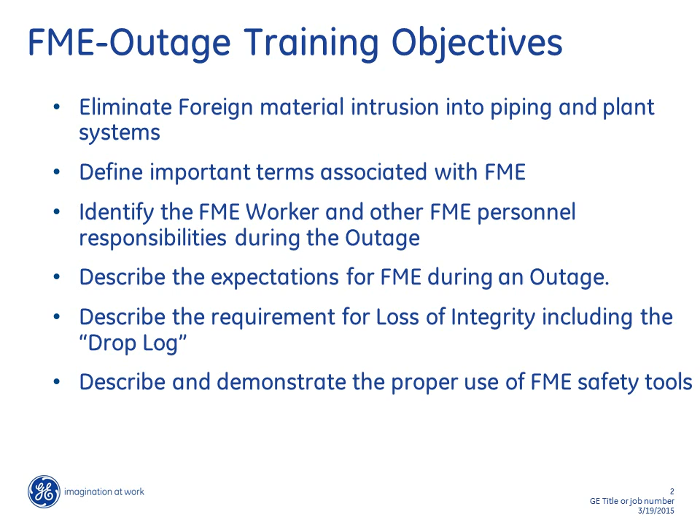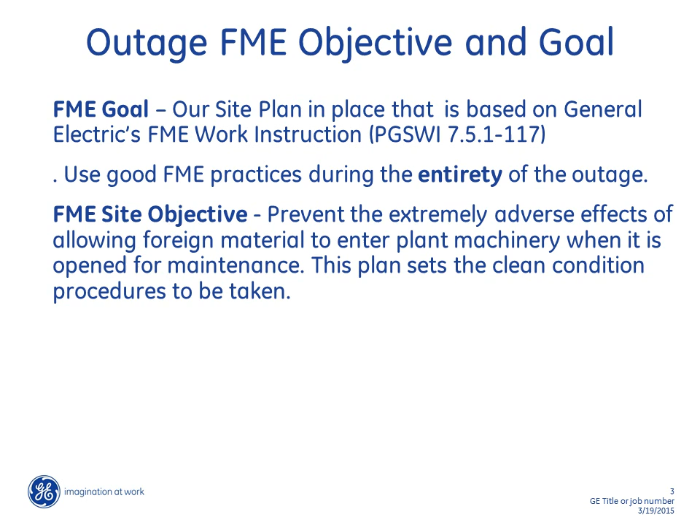As explained before, our FME goal is based on the site plan, which is based on General Electric's Foreign Material Exclusion Work Instruction. We will use good foreign material exclusion practices during the entirety of the outage. The site objective: prevent the extremely adverse effects that come from allowing foreign material to enter plant machinery when it's open for this outage. This plan will set the clean condition procedures to be observed during the outage.

When we think of foreign material exclusion and some of the best practices, let's concentrate on some of the do's and don'ts. Cover all open pipe work, flanges, equipment as soon as it's opened or disassembled. We're going to bag or cover all openings, ideally using the orange FME drawbags. We're going to try to use colored material if we do not have the drawbags available or if they're not appropriate for the covering. FME devices put in place will be tagged to avoid them being left in place.

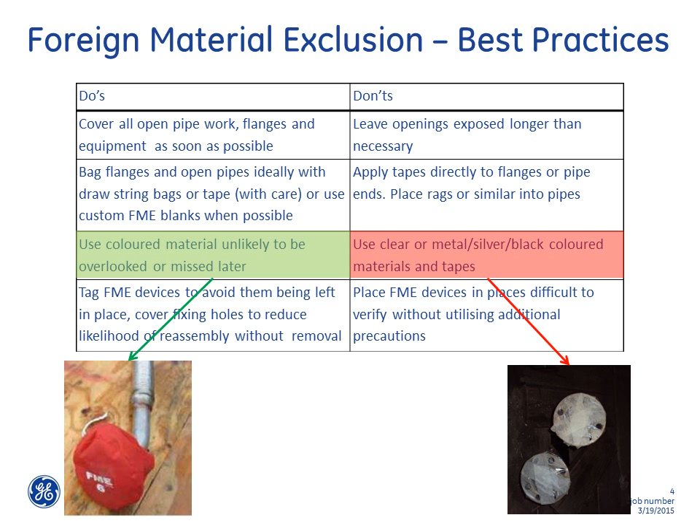On the don'ts, we will not be using clear or metal silver colored material, which could be missed during reassembly. These practices are nothing new to us here at GE. We've been doing them at the previous outages. This looks similar to what we've been doing and we will continue to do during this outage. A good FME program.

Some of the responsibilities. The site lead will develop and train all the crew of the requirements. The field engineer will review on a shiftly basis for adequacy of our FME program and the applicability to any upcoming task, especially if new or emergent work comes available. The supervisors will ensure the crew FME training is adequate for the personnel. They will brief the crews on specific FME requirements for their job task.

Using the audit log for tool accountability, they will check it at the end of each shift. And if appropriate, they will assign monitors to check the plan compliance and ensure compliance. You may even find that we have monitors to help log the ingress and egress of materials.

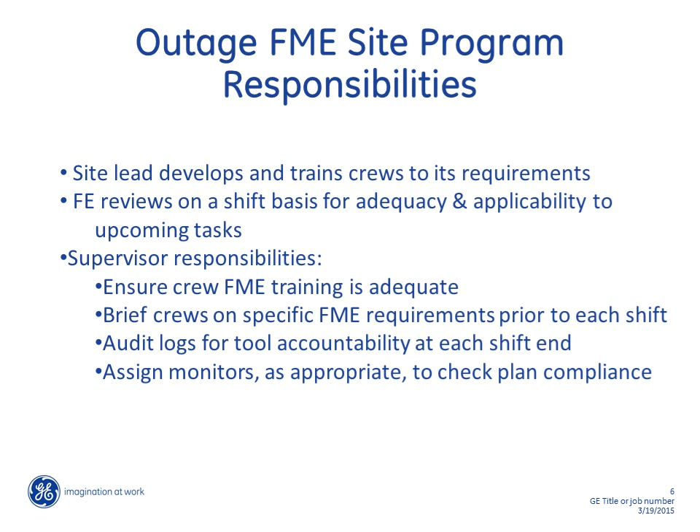Some of the responsibility for the FME workers. When we start breaking systems apart, cover all the openings. Cover the piping, cover the open system. Limit the amount of tools you carry towards the FME area and into that FME level 1 area. The idea is if we carry too many tools in, things get knocked in, things get misplaced, we don't have enough room, that's when the accidents happen. Select some of the tools and equipment, the minimum that you need for the job. So it limits the potential for loss into an area.

When we transfer or move equipment and tools, try to do them in a way where you avoid that FME level 1 zone. Think about this. Think about the crane moving things for us in boxes and bins or tools, if it were to drop or become dislodged. And if anything is dropped or lost or can't be found, just report it immediately. Let's get it in the drop log. Let's try to find it. Let's try to retrieve it before we carry on.

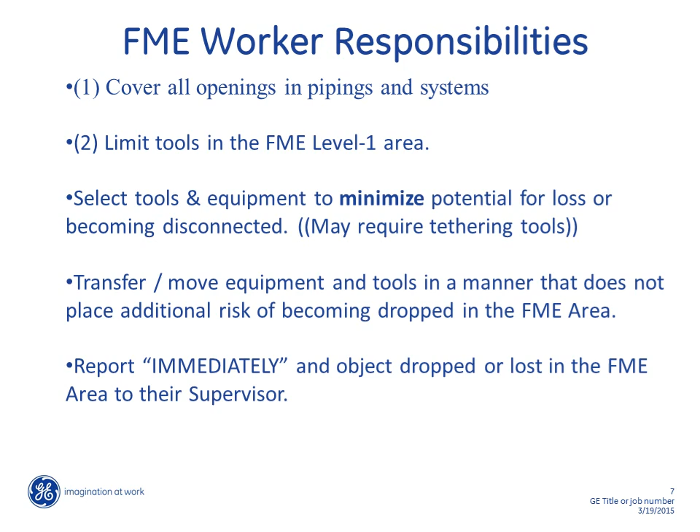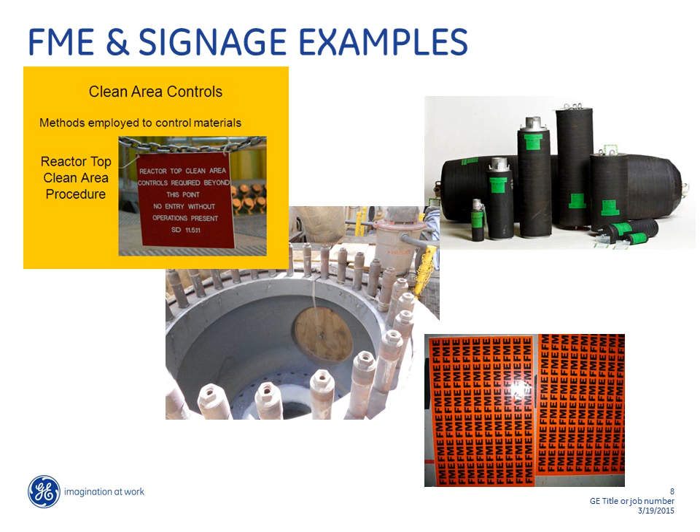Here's some typical signage and examples of tools we use for good FME protection. The clean area signs, labeling where the entry points are, some plugs. You see one here in the steam valve. You see different plugs for different sizes. We're going to try to avoid bags and rags. Down at the bottom we have the magnetic tape. That's a good one for the bottom of bearing drains.

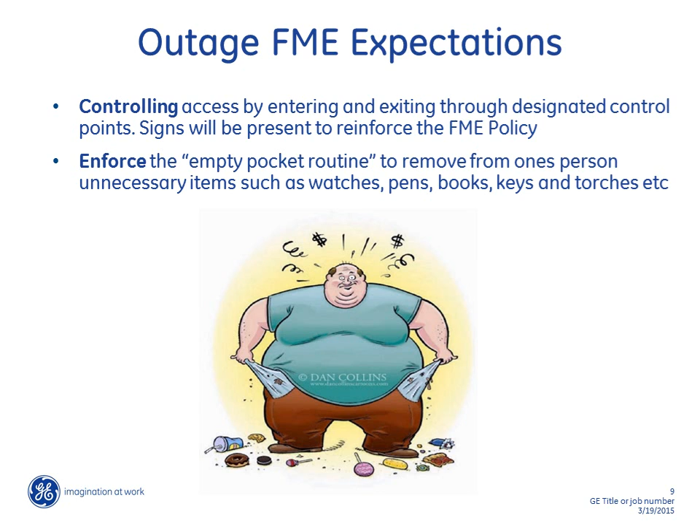The biggest thing is to enforce the empty pockets rule. Limit the amount of material you take up to the FME area. That will limit the amount of potential that we have to spill anything into the FME area. We try to control the access to designated areas. That helps control any foreign material that is brought into the area, especially from vendors or third parties. They must be trained in our processes also. We want everybody entering and exiting through designated areas. That helps monitor, that helps keep track of any material in and out.

For our 6 Bravo unit, we'll be doing a gas turbine major with the bearings open, the rotor out. Drop log will always be used. All pipings and systems, as they become disconnected, will be covered. Disassembly, cleaning, general inspection, all the general FME practices, the good FME practices that we use every outage. We'll go to that FME level 1 just prior to setting the rotor back into the unit. We will use FME devices and device logs, covers, plugs in the casing, in the bearing areas, and in the appropriate piping.

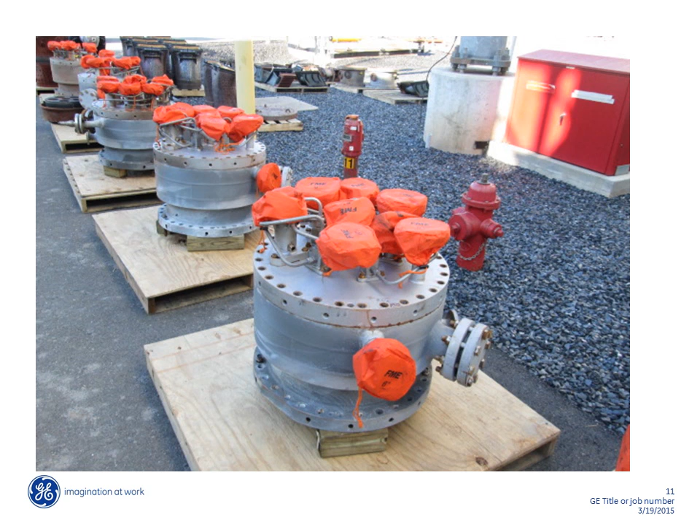Just another example of good FME practices. When we think about our gas turbine, the level 1, the controlled access, a buffer zone. Level 1 will start at the plane of the compressor turbine, the machine proper, which will include the bearing areas. Just outside of that level 1, you have a buffer zone. You try to limit the amount of tools, material, and personnel that are left in that buffer zone. By limiting the amount of tools and materials in the buffer zone, you eliminate the potential for material to get into your unit.

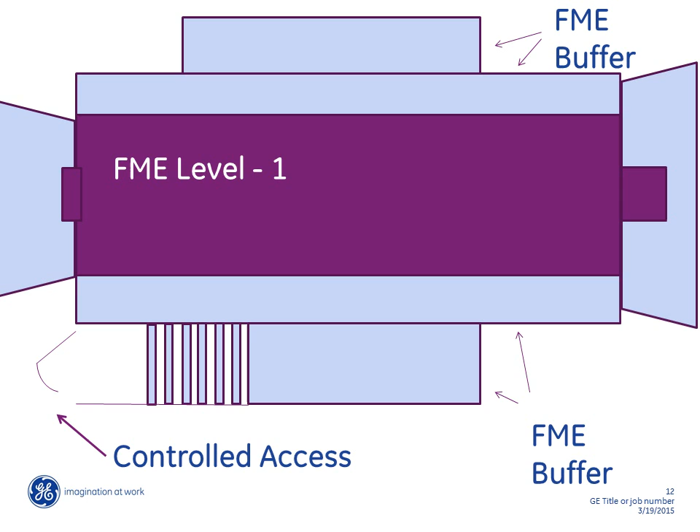On the 6 Alpha gas turbine, drop log, from the very beginning of the outage to the end. Again, all pipings and systems are covered. Disassembly, cleaning, perform the general FME practices just like we always do. When we go to lift that turbine case, we want to start observing level 1 practices. Yes, we're going to pull out all of the hot gas components. Our rotor will still be left in. We'll maintain level 1 on the combustion end prior to combustion rebuild. Always FME device log, always putting in FME covers and plugs where appropriate.

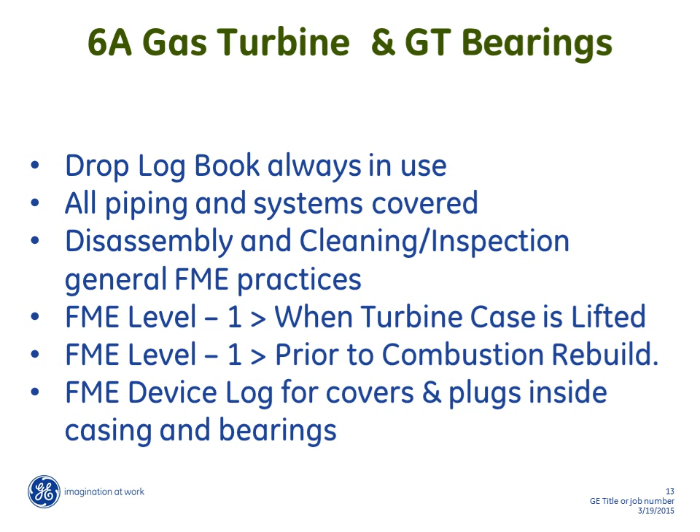Generators or generator coolers. As soon as we start to open them, we have a drop log in use. Report any dropped items immediately. Again, so we start to uncover all pipings, all systems, cover. Cover with an FME bag. Disassembly of the bearings will start that FME level 1 at that bearing. FME level 1 will be maintained throughout the outage, beginning right at the plane of the generator. The buffer zone will be back from that. And as always, we always have an FME device log, especially for our bearings, bearing drain covers, plugs.

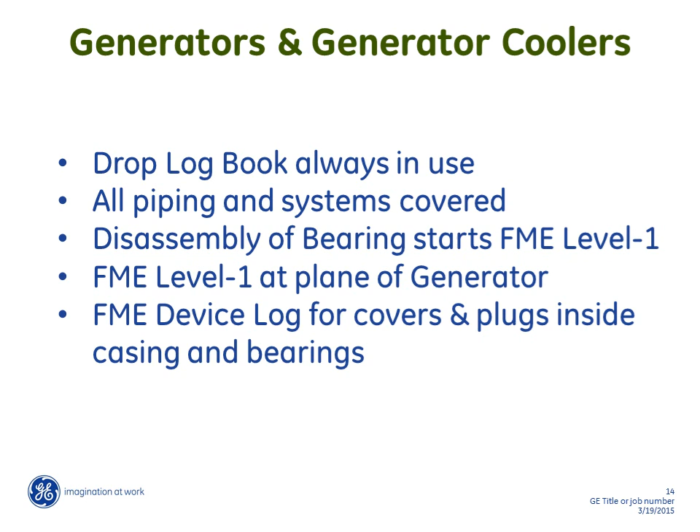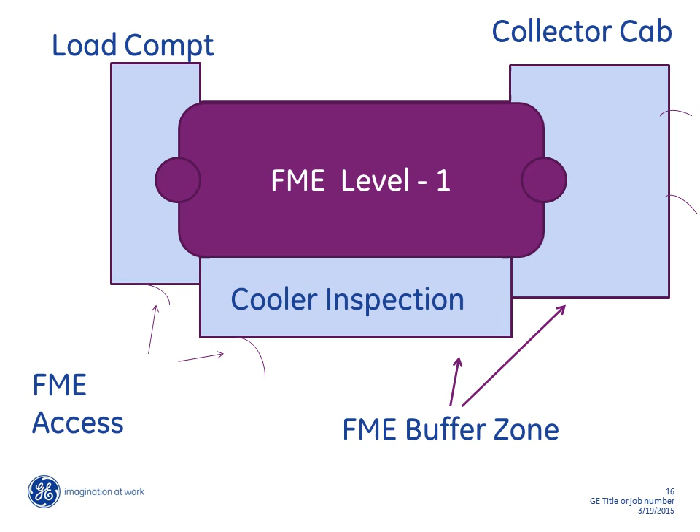So what do we mean by an FME level 1? FME level 1, generally established when a final visual inspection cannot be completed for the open system. When you can't just readily reach in and grab something. When you can't readily see all the areas. Generally, if we look at a gas turbine inlet, we can see everywhere. We could reach up and grab anything in a corner. We don't use that as a level 1.

However, hot gas path. The lower half components are already in. The rotor is in. Anything over that turbine from that turbine shell in should be level 1. You want to log anything that passes beyond the plane and make sure it's brought out properly and make sure your log reflects that. Level 2. Implemented when a final visual inspection can be completed. When a dropped object can easily or readily be removed.

Here we talk about the buffer zone. Here it says 2 to 5 feet away from your FME boundary itself, that level 1 or level 2 boundary. And the idea is it gives you a buffer. You try to limit the tooling and materials there. It can be staged there, but you try to limit it so it doesn't get into that FME level 1. An FME device or an FME barrier, that's usually your hardware. It's a plug. It's the magnetic strips that block objects from entering into the piping or system.

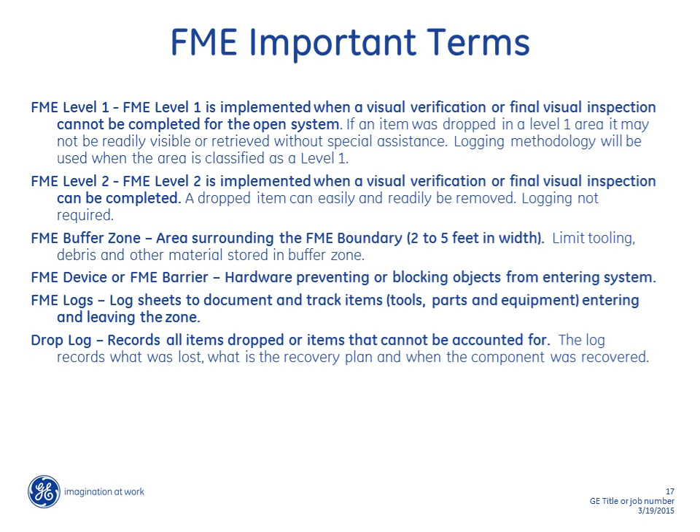And then the drop log. Drop log is just used to account for things that are dropped so we can get them retrieved. And it may be during disassembly that it gets dropped or slipped down a piping. We document it, we get the information, where, when, what is it, about where is it at, so that we can get it retrieved, or when we finish opening up the rest of the system, we can reach in and retrieve it. Then we'll fill out the drop log. Yes, we've retrieved the item. It's no longer a dropped item. And we continue on with our outage.

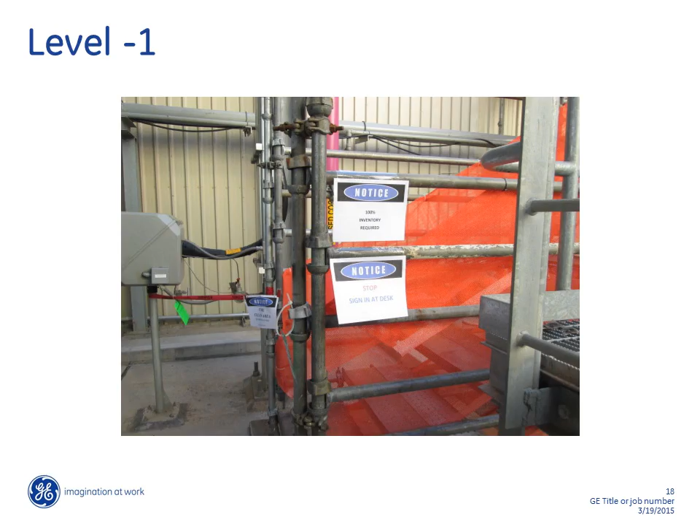Good example. Beginning FME level 1. You've got the fencing that helps designate where your access point is. The signage that tells you about 100% inventory is required. It tells you go to the desk and sign in and out. Example, some of the tools. We talk about loss of integrity and tool accountability. We have the drop log. We just touched on the drop log.

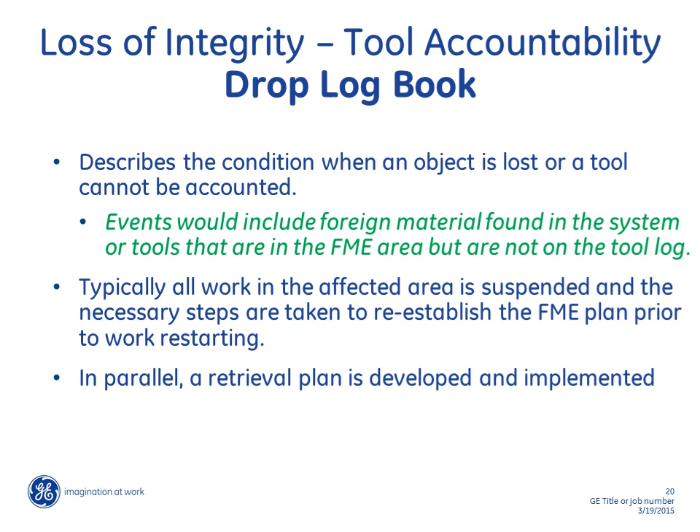Drop log, if you've dropped something in, or if you just happen to see something in there that you can't retrieve. May have been left over. And especially some guys that have worked the steam, they understand we look down this steam piping, and all of a sudden we found all kinds of things down here that weren't us. Get it logged. When we do the drop log, that's when we may have to get some outside help, GE Inspection Services with some good retrieval tools. It may just be that we have to take another end of the piping off and we can reach in and retrieve it ourselves.

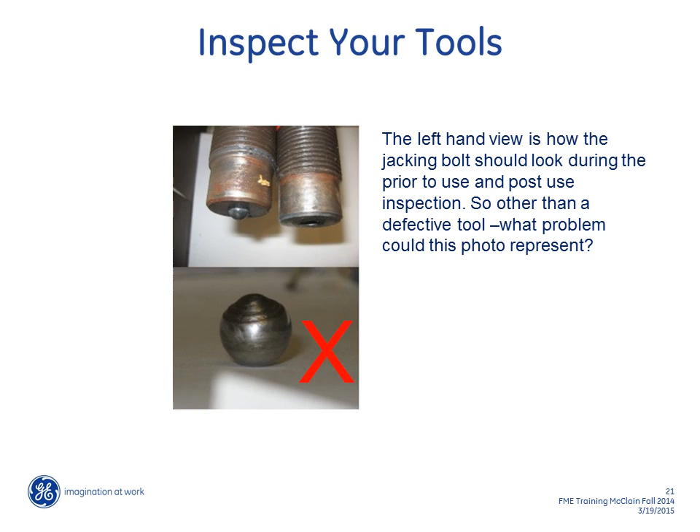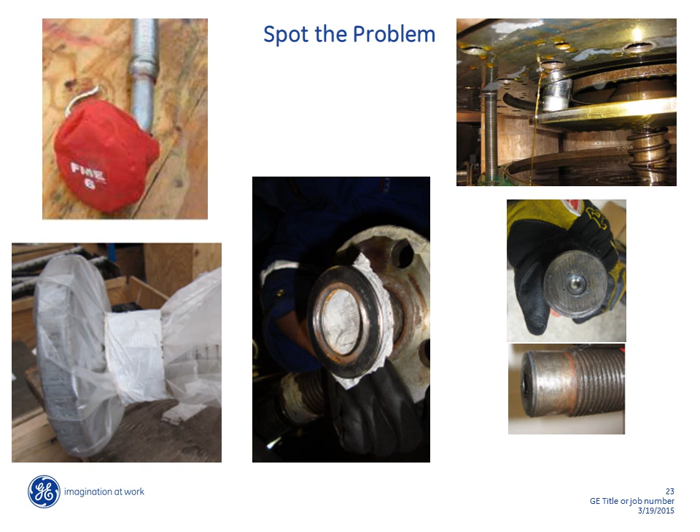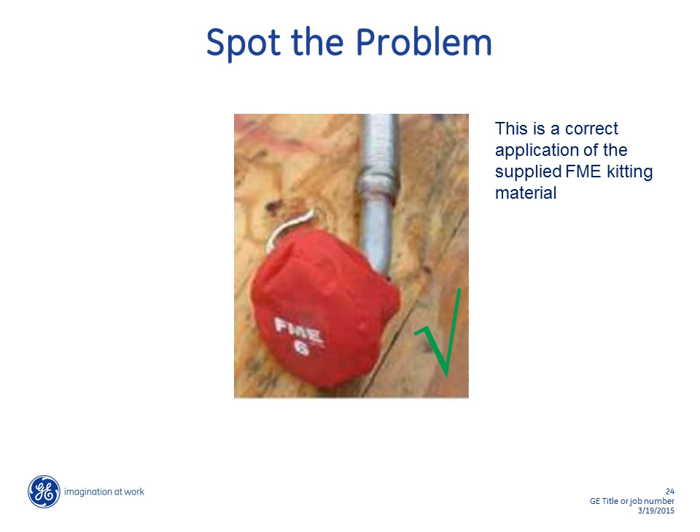Real good example of FME. This is what we do all the time. This is what we expect, and the customers expect. Some of the questions. So when do we start this drop log? Very beginning of the outage. Starts from day one. We don't stop till the outage is complete. So when do we start these FME practices at all? Very beginning of the outage. We don't stop our FME practices till the end of the outage. Again, let me remind you, emergent work that comes up, things that weren't in the schedule, unplanned things. Think about, what do we need to do? What areas do we need to add to this FME program?

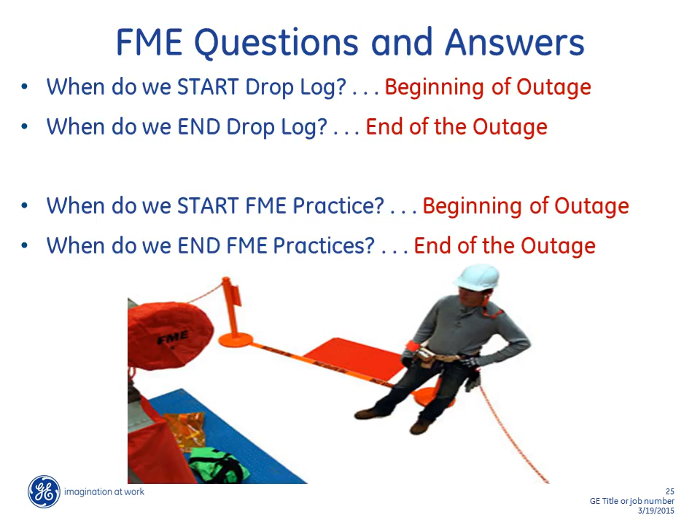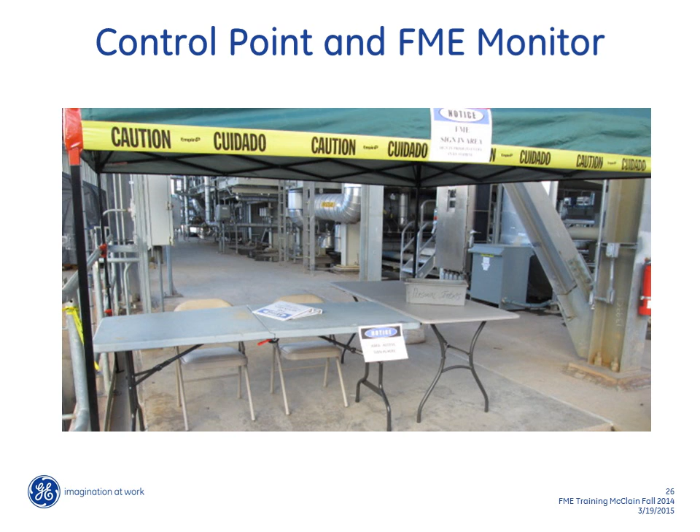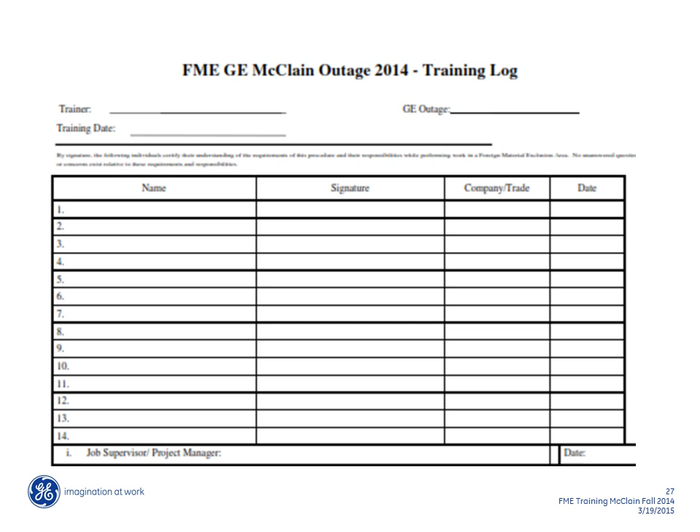Help each other out. If you got a buddy coming up with a bucket too full, ask him if he needs all this. Is he going on break before he'll ever use half of the stuff in this bucket? If so, just wait till next break to bring the half in. Or help him sign things in and out. Part of this is a training log to show who's trained, who's authorized to come into our outage for FME, who's coming to our FME area, and who's allowed to be a monitor.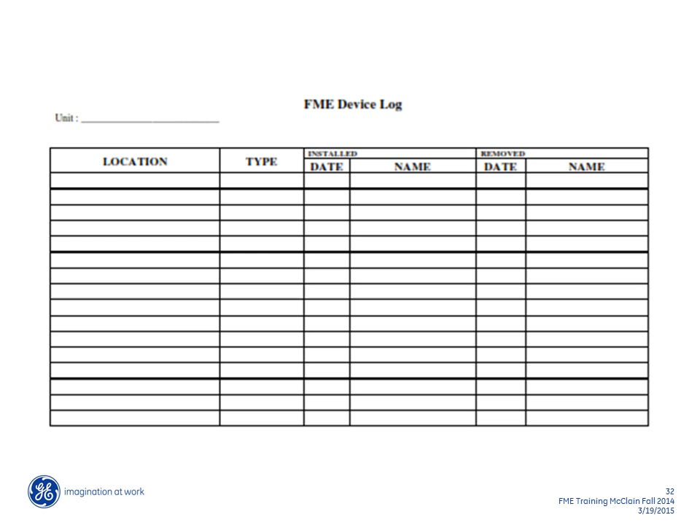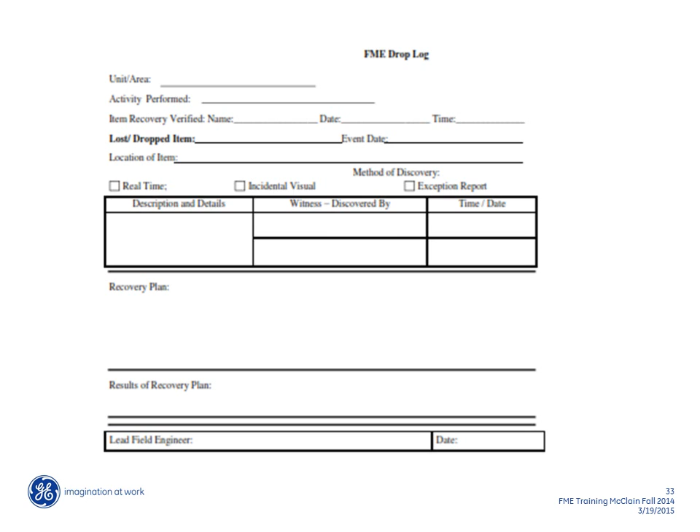Just another drop log. Shows the area, the time, what was dropped, any brief description, and perhaps a recovery plan. And of course, most important, when it was retrieved. That's all we have for our FME program here, Dominion Possum Point, for spring 2015.